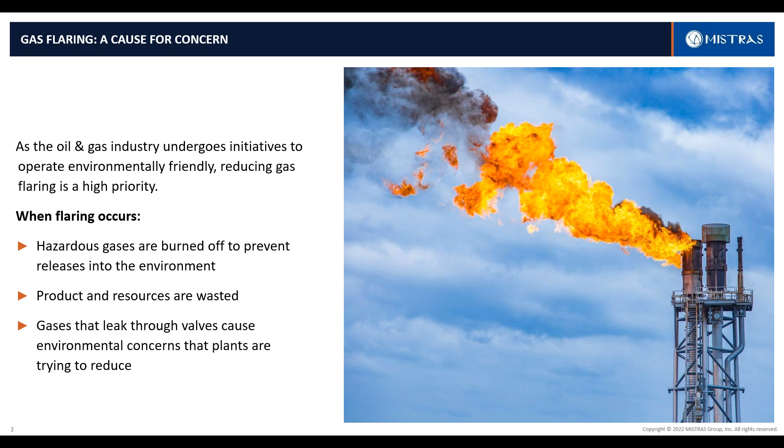Just to give you an example, the International Energy Agency estimated that global efficiencies for flaring in 2020 were about 92%. So with a 92% efficiency, that means 8% of natural gases and NGLs were not combusted and were released into the environment. Obviously this is of concern, and the efforts to reduce this are what we're going to be discussing.

Just to give you another example, flaring activities resulted in about 265 metric tons of carbon dioxide emissions in 2020, and about 8 metric tons of methane emissions. Again, these are emissions that we want to see reduced so that the effects of greenhouse gases can be reduced in the environment. Globally, 142 billion cubic meters of natural gas was flared off in 2020.

To give you an idea of what that volume represents, it's enough natural gas to provide the demands of Central and South America for a year. So that's quite a bit of gas being burned off throughout the world.

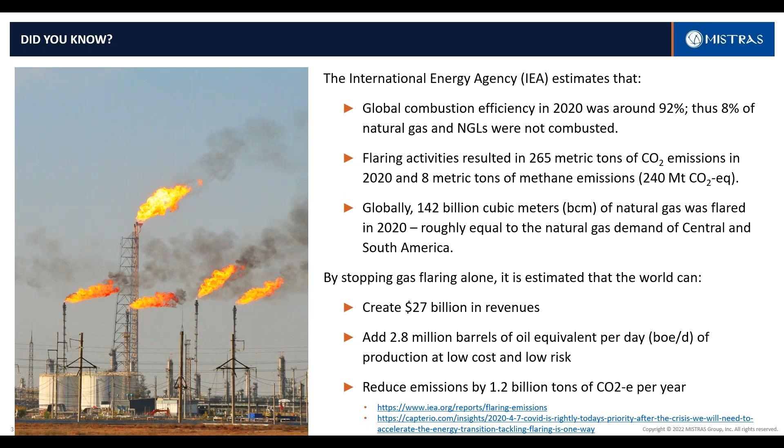So how are we approaching this problem within Mistras? We're utilizing acoustic emission technology, which allows for inspection and monitoring solutions to detect and quantify through-valve leakage without having to shut the operations down.

There are two different devices. One is a handheld instrument, used for surveys and spot checks in the field. It's a portable instrument and it's pretty convenient to use. Because of its small physical size, it doesn't restrict anyone if they need to get into confined spaces or spaces with limited access, or what we call unique testing spaces, which can be anything from a crawl space to near the top of the stack.

It's also lightweight, handheld, and battery operated. So it's a nice little tool to walk around the plant and take various measurements on valves and conduct the survey.

The other tool available is a 24/7 monitoring device, which can be installed on a valve. With 24/7 monitoring, we now have available daily reports or weekly reports, however we want to generate them. It also, with this kind of approach, we can activate alarms. The alarms can be based on various parameters that are being measured or trended.

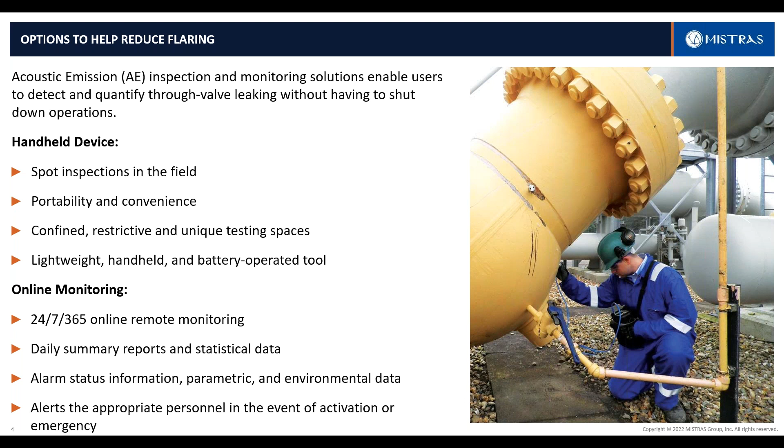This is the portable instrument. It's called the VPAC-2, and as I said, it's a small, lightweight unit, weighs 1.7 pounds. It's IS certified, so we are able to use it in various areas of the unit. Battery operated, there's a charger included with the unit, a couple of different sensors depending on what the application is and what the intent of the measurement is, and we'll talk about that a little bit later.

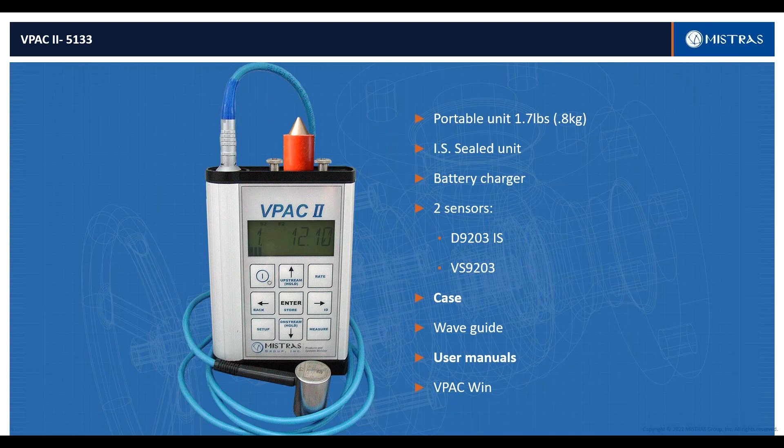It comes with a case, it comes with a waveguide. The waveguide is a device that allows it to work at higher temperatures, and again, we'll talk about that in a little bit. There's a user's manual, and there's some software then that can be used to log and trend the data. So this is the basic package for the VPAC-2, which is the portable spot check unit.

And this is the continuous monitoring unit. Again, it's small size, can be used across a number of different frequency ranges, weighs 0.35 kilograms, so it's very lightweight. And this unit connects directly to DCS via the 4 to 20 milliamp loop.

So all we're doing here is installing the sensor, mounting the unit next to it or in close proximity, and then running a wire back for 4 to 20 milliamp connection into the DCS. The DCS is then used for data logging, data trending, and data alarming.

Small sensor, very small physically, and the unit is self-powered in that it gets its power via the 4 to 20 milliamp loop. And again, this one is IS certified too, so both units are certified intrinsically safe and used for just about any area.

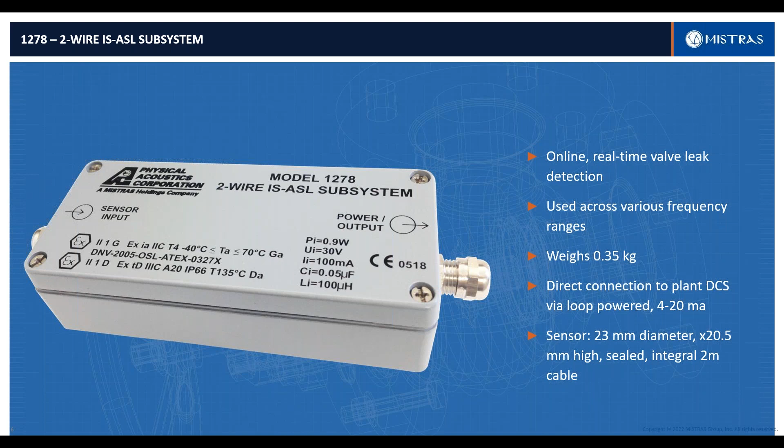There are a number of benefits of having this capability within an operating unit. As we mentioned earlier, one of the first things is to reduce losses to the flare. Even if there's a gas recovery system, there are savings to be had, as the recovery system results in burning product and hydrogen as fuel gas. So by reducing the amount of losses going into the flare, we're saving money. It's a cost reduction, and a very notable cost reduction in some cases.

It's a great maintenance planning tool. Doing a survey prior to a turnaround helps you identify which valves are the ones that really need attention during the turnaround, and which valves can be left in place and not disturbed because they're showing no indication of through-valve leakage. So as a maintenance planning tool, it is an excellent device and really pays for itself the first time you do a survey.

Obviously, we want to reduce losses through leaking valves that may be connected to a venting system. And these are environmental issues. So again, reducing losses that get vented to the atmosphere is going to save product, and it's going to reduce the amount of contamination in the environment.

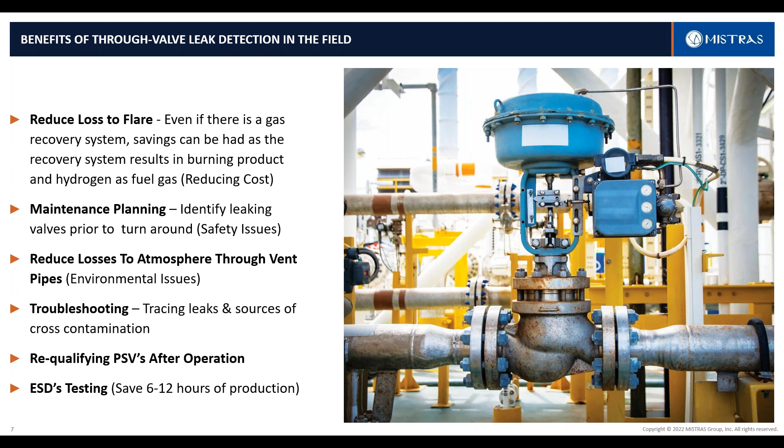Pretty much any kind of damage in the valve that's going to allow product to bypass it or leak through it can be detected. The damage can be a number of different sources. It could be eroding the valve components, cavitation occurring and damaging the valve, or deposits building up inside the valve.

Just a whole number of issues that cause product to leak through a valve are detectable with this technique. It's relying on the noise of the valve leaking, and if there is a component that is allowing the valve to leak, it should be detectable with this approach.

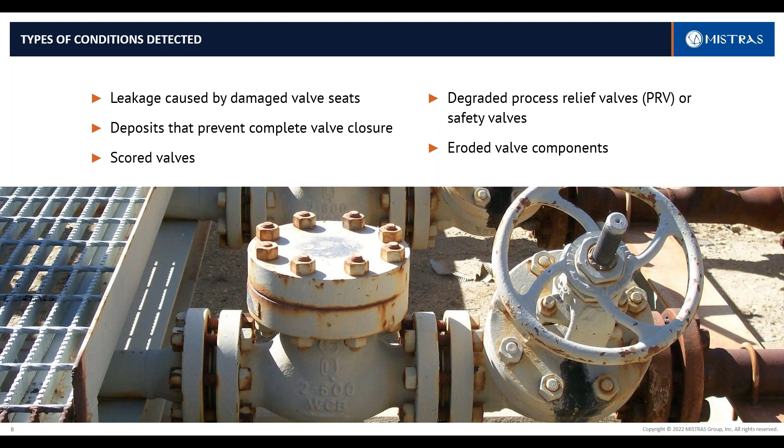So we looked at a number of different damage mechanisms to the valve, and for the most part, all of these can be detected readily with this approach.

We've had a lot of field experience with the unit, and generally we go around and make the measurements. Our experience is in a typical unit, about 5 to 10% of the valves are indicating some sort of through-valve leakage. And again, the old small percentage gives you the biggest problems.

We find that a small number of valves generally contribute about 70% of the losses. The issue here now is to find those 1 to 2% of the valves so that we can cut down on the amount of losses occurring within the unit.

It's pretty sensitive. Leaks down to less than 1 liter per minute can be detectable, so we do have the ability to detect fairly small through-valve leakages with this unit. And leaks that exceed 1,000 liters per minute from individual valves are the real troublesome ones.

So there's a variety of experiences we've gained over the years, but typically our experience shows that we need to find that 1 to 2% of the valves that are causing the majority of the leaks.

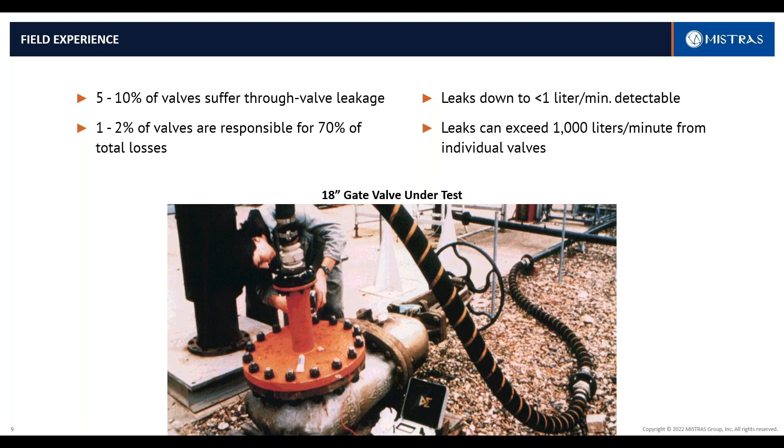So there is a considerable amount of money that can be saved by determining which of those large valves are actually causing the leakage.

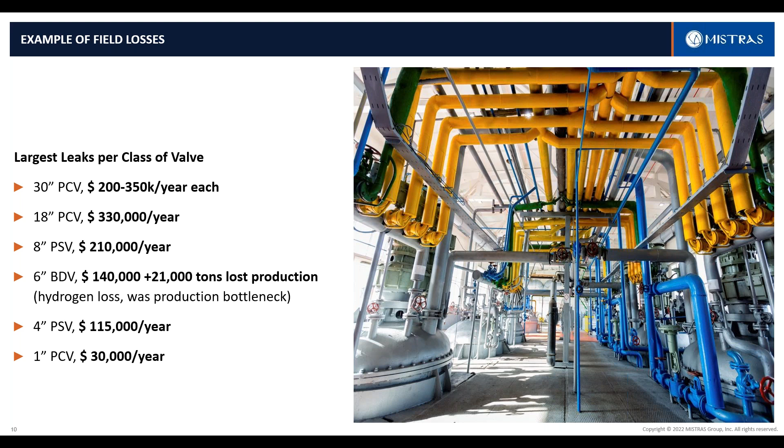So looking at different size valves and the potential for savings, yeah, you could look at it and say, well, anything above a 4-inch valve, I can save a lot of money. But on the other hand, ignoring a 1-inch valve that may be experiencing leakage is still a problematic thing and has some substantial money to be saved.

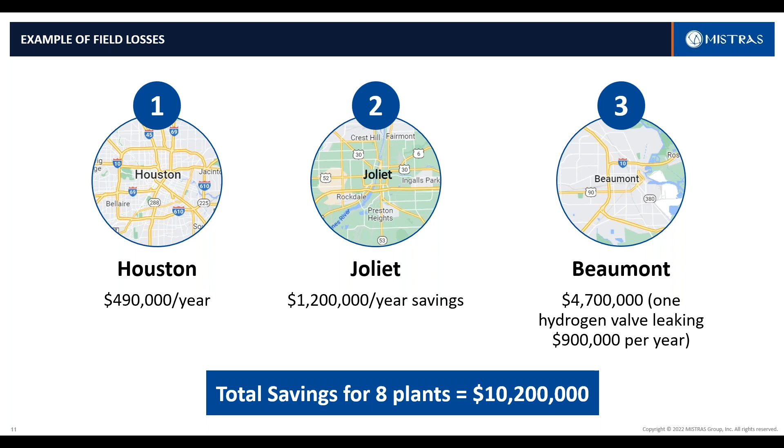Now at this point, I'm going to turn the presentation over to my teammate here, Lane Kingston, and he's going to go into a little bit more detail on the mechanics of it and some of the experiences he's had using the instrument in the field. Lane, it's all yours. Thank you, Sam.

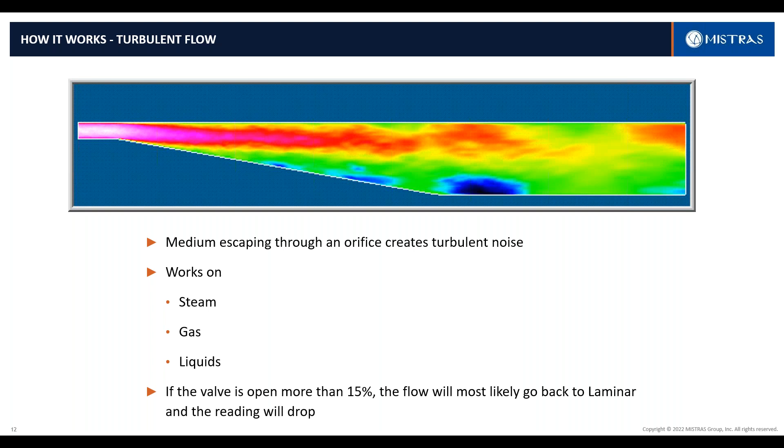If the valve is open more than 15%, the flow will most likely go back to laminar and the reading will drop at that point. So if we know that the valve is open, we're not going to be able to use the VPAC. So we have to make sure that the valve is tightly closed, or in that closed position, and then we can tell you if it's leaking or not when we test it.

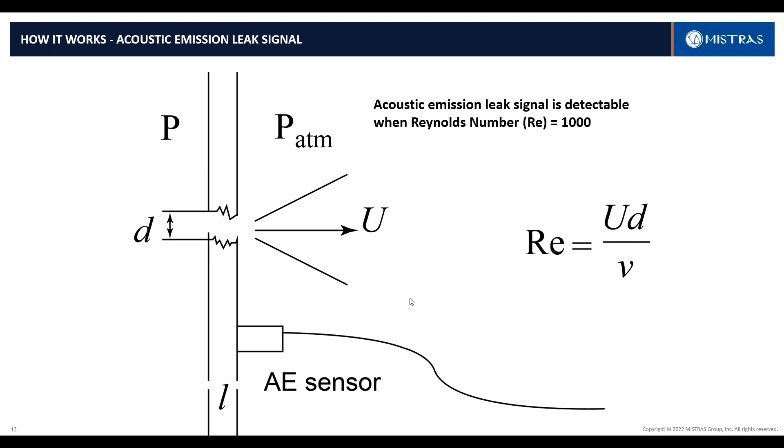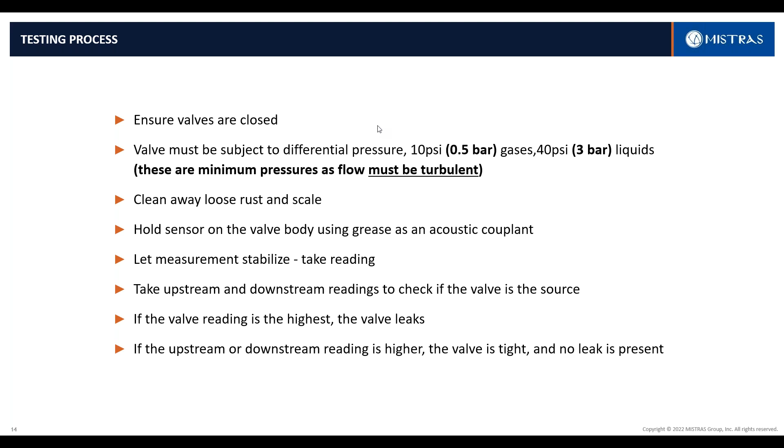We let the measurement stabilize. When we take the reading, we'll give it a few seconds, and then we can take that reading. We can note it down on a spreadsheet, or we can enter it into the VPAC itself. We take the upstream and the downstream readings to check if the valve is the source. If the valve reading is the highest, the valve is leaking. If the upstream or downstream reading is higher, the valve is tight and there's no leak present.

You usually take the downstream and upstream about half a meter to a meter away, depending on whether you can get to it or not. Sometimes I've learned when I'm doing my testing that I have to reach a little further away to get a better reading; it could have pipes or something else in the way.

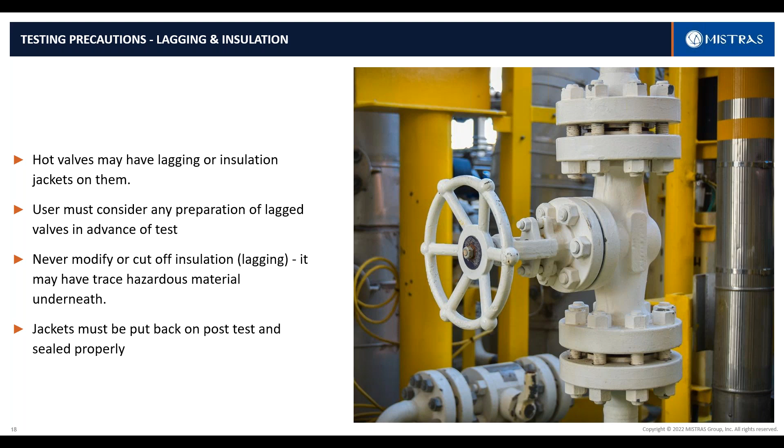A lot of times what I used was the little portholes they use for inspections, maybe UT. I would use those if they're close to the valve. If not, I would have the facility go in and cut the holes or remove the insulation prior to my survey.

Again, surface temperatures. The probe will operate at a temperature up to 125 C, not continuous. For temperatures above 125 C, we use a waveguide. That extends the signal a little bit. It keeps the heat from transferring directly onto the sensor, but there will be a loss of signal through the waveguide.

When you find a leaking valve, note the reading. To get the correction for the waveguide, you would retest using the waveguide, note the reading, then notate the difference, as this gives you the correction for the waveguide. However, the readings will be less sensitive and cannot be used to estimate leak rates. They can only be used as a guide.

We talk about someone going in and doing surveys for you. What we try to do sometimes is combine technology with expertise. We go in, we can do a full survey. Most facilities have around 1,000 valves and bypasses that need to be tested, which can be time consuming. Over the course of a routine day, personnel may test 40 to 70 valves depending on the route and where they're located. It could encompass approximately 4 weeks worth of testing if they have 1,000 valves.

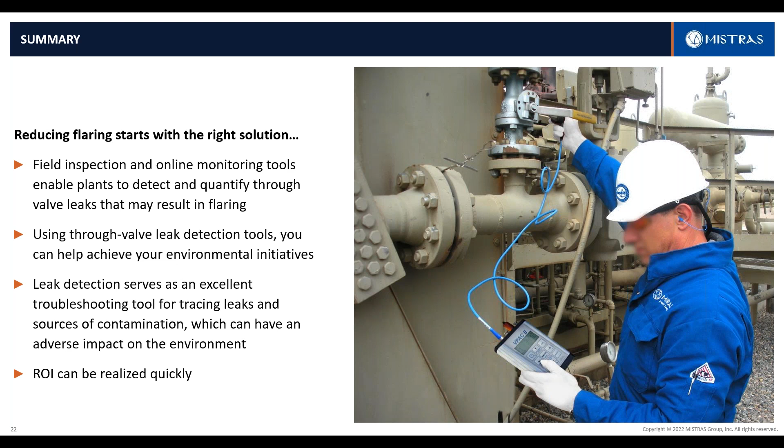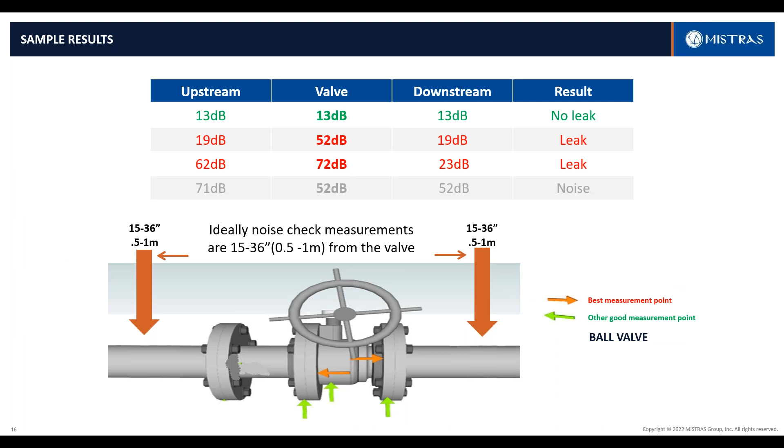Okay, Sam and Lane, I'm going to kick off with a question I have. Lane, I was hoping that you could help me with this. I was wondering what type of valves can be tested with the kinds of solutions that were discussed in this webinar? Well, I think we have this on the sheet here, so I'll bring it back up to that slide. Okay, right now, we can test all different types of valves, different sizes. We have plug valves, gate valves, ball, globe, butterfly, RV plugs, PSVs, PCVs, even the bypasses. So there's all types of valves that we can test.

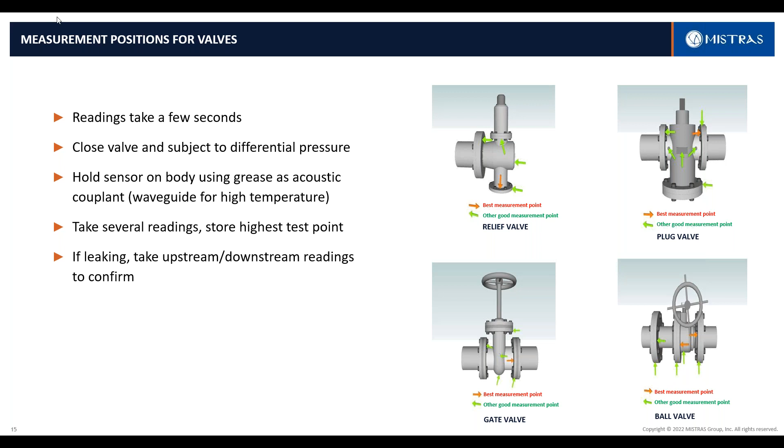Okay, brilliant. Thank you for that, Lane. Another quick question for you. Data security is obviously paramount at the moment, and it's something that we get asked about all the time. So I was wondering, how do you store the data that is taken with the instruments? Well, the instruments can store up to like 50 valves at a time in a route. And each valve requires 3 measurements and other information fields, like the serial number, the name, the pressure, inlet size, valve type, valve seat type, equations and stuff like that.

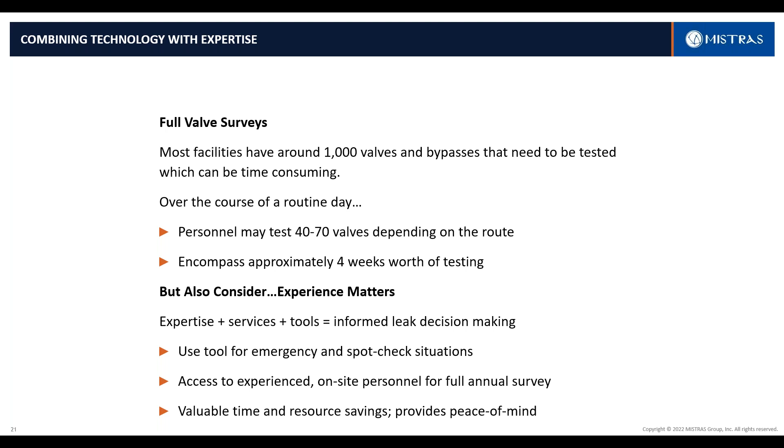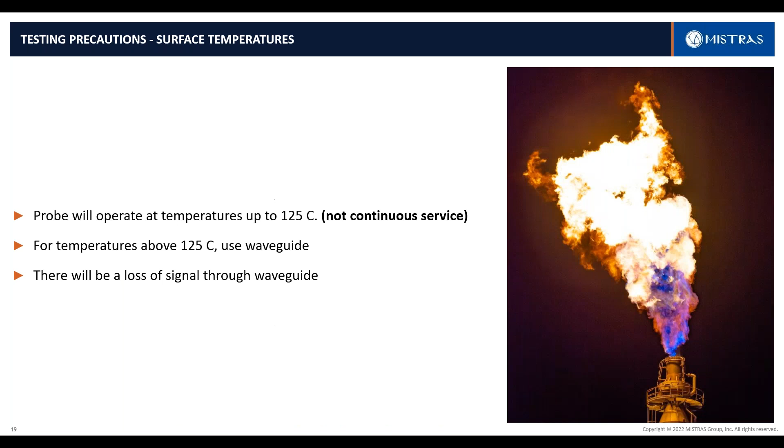To set these fields up to generate the data based on the collection of the valve over time, the system is sold with a software called VPAC Win. This software can be installed on any PC running Windows 7 and above. At that point, you would go in and interact. When you go with the VPAC and you save all that data into the VPAC, you would take it back to your laptop, connect it using Bluetooth, and then transfer that data from the VPAC itself to the software. At that point, it would enter all the data into the software. Let me see if I can pull that up here. And it would generate your leak rates for you, as you see here.

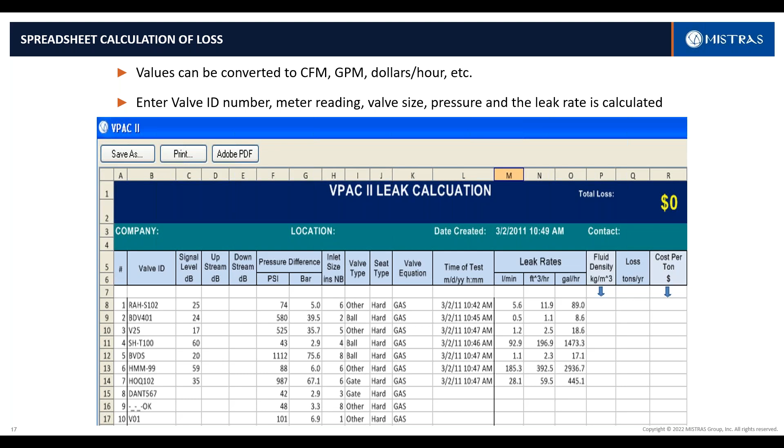Okay, brilliant. Thank you, Lane. We've had a question come in from Nicholas Dunn that you may have touched upon, Lane, at the end of your presentation. He wants to know how accurate the leak rate calculation of the valves is. I'm going to let Sam answer that one, if that's okay.

The way the algorithm was developed, it used empirical data, and the solution is a best fit straight line for the various different conditions that are experienced in the different valves, etc. But as a rule of thumb, we typically use 5 to 10% as the accuracy value.

And so what we developed in the analysis is a best fit result applied to a large database of data from all different kinds of valves, all different mediums, all different pressures, and also whether it was liquid or gas. And so because of the large variance in the database, the solution is a best fit solution with an accuracy of about 5 to 10%.